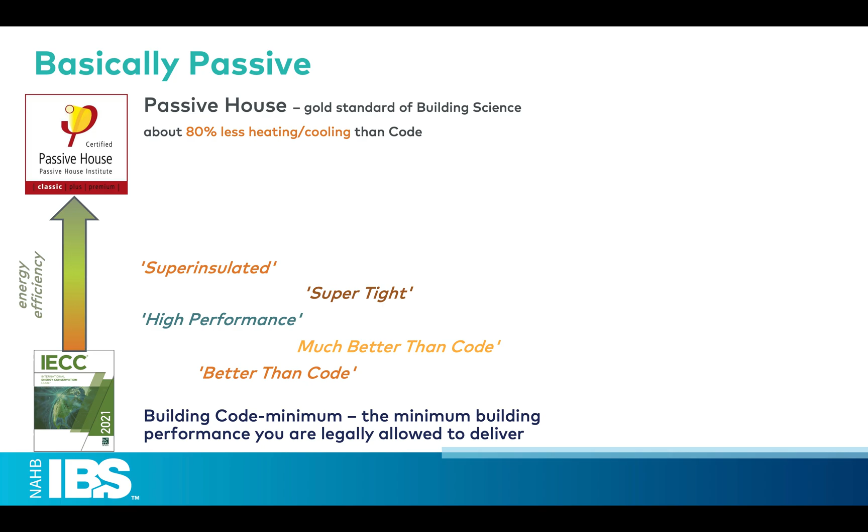My building is super tight. It's super insulated. It's a zero utility house. It's so good. It's passive solar. It's basically passive, but we haven't done the modeling.

Now, all of these terms are so confusing and they circulate freely and constantly in the construction industry, which makes the conversation much foggier and difficult to understand for everyone. I'm not saying the passive house certification is the answer for all projects. What I'm saying is that we want to have clear expectations when we start off on a project, because based on that expectation, we define success, we define failure, and we have an expectation set up with the client to meet. It's a promise that we meet, and we have to deliver on that promise.

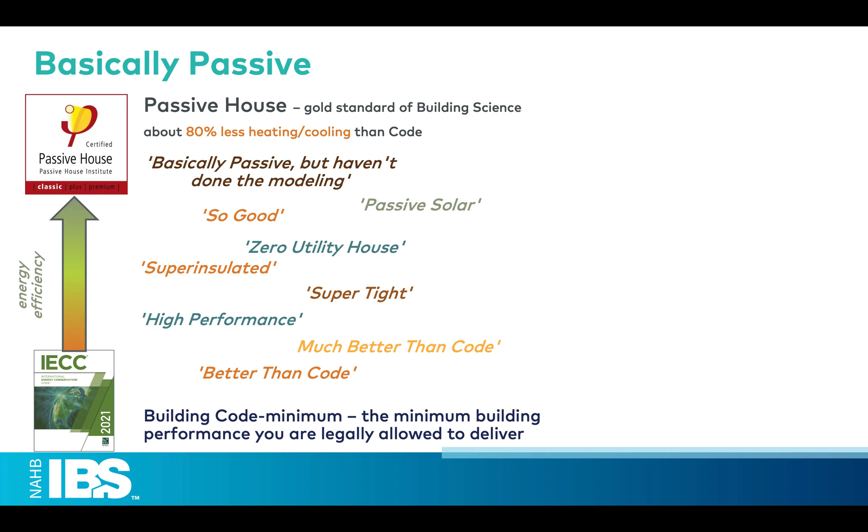Now, take a step back from the construction industry and think about this. You go to the hospital because you have this. Your arm hurts and you want to get an answer. And the answer you get to the hospital is it's broken, or it's basically broken. It's better than broken. You can see this is the same logic that we have on the left-hand side of the screen for the construction industry applied to the medical field.

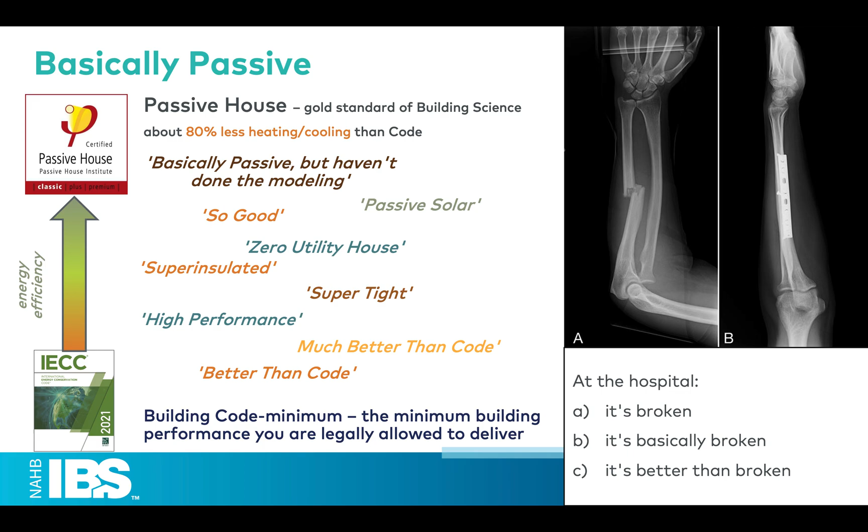If at the hospital they told you it's better than broken, you would flip out. You would not accept that. In the construction industry, we get all of these fuzzy definitions that mean nothing, and we are okay with that for some reason. Now, there is a risk with that, and we call these intermediate obscure terms, super tight, so good, better than code, we call these floaters because they float between the minimum of code compliance and the maximum of passive house certification.

And again, I'm not suggesting to certify every single building. What I'm saying is that we have two standards, code and passive house, that are very clearly defined. You can go online and find the definition of code or the definition of passive house and follow them. And by compliance or by certification, you can have certain expectations and goals. Whereas if you are floating in between, it's very hard to manage because you have undefined expectations which do remove structure. It makes everything harder to pin down.

I heard from the client that they want this window because their cousin told them it's better performance than XYZ. Now, for code compliance, we have a maximum allowed U value. For passive house, we have what is called the comfort requirement that drives the selection of windows and doors. And anything in between, if you remove those two, you are guessing. You are tossing a coin in the air and trying to catch it and see which direction to go because you just don't know. The risk is to overpromise and underdeliver, to overkill or overpay. There's many risks with this, which all come down to the expectation not being well defined, and it's very hard to meet or deliver an expectation that is not well defined.

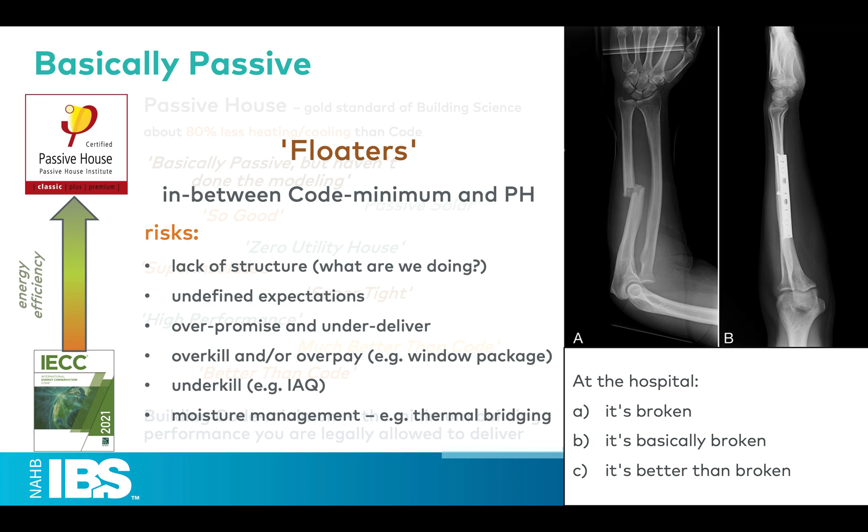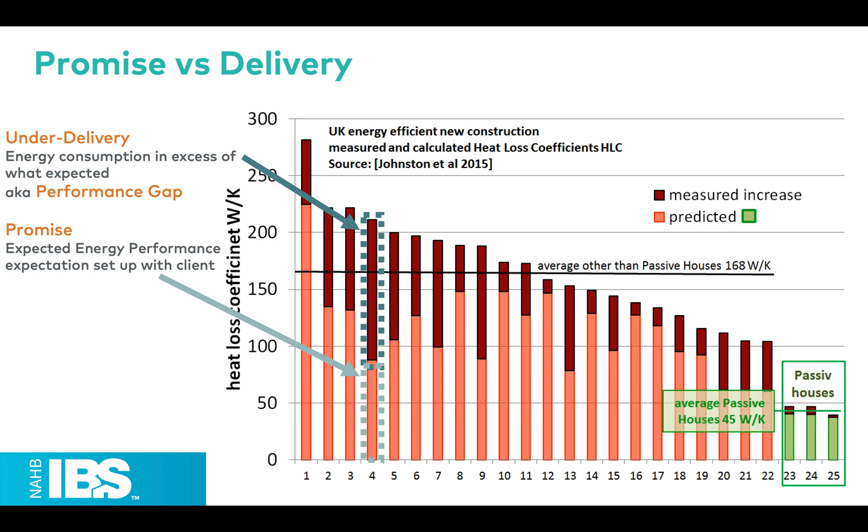Now, this is an example from the UK of monitoring the energy performance from multiple buildings over the years after occupancy and seeing how they were delivering the performance of energy efficiency that they started off with from the design. So we have a promise that is the predicted or expected energy consumption, and that is the salmon pink part of these columns. And then the darker maroon red is how much more energy these buildings were consuming because they were not meeting the expectation. There's a performance gap between the energy consumption that the design expected and how much energy they're actually consuming. And in this graph on the right-hand side, we see three passive house projects where the gap between predicted performance and measured results is so small that it's basically negligible.

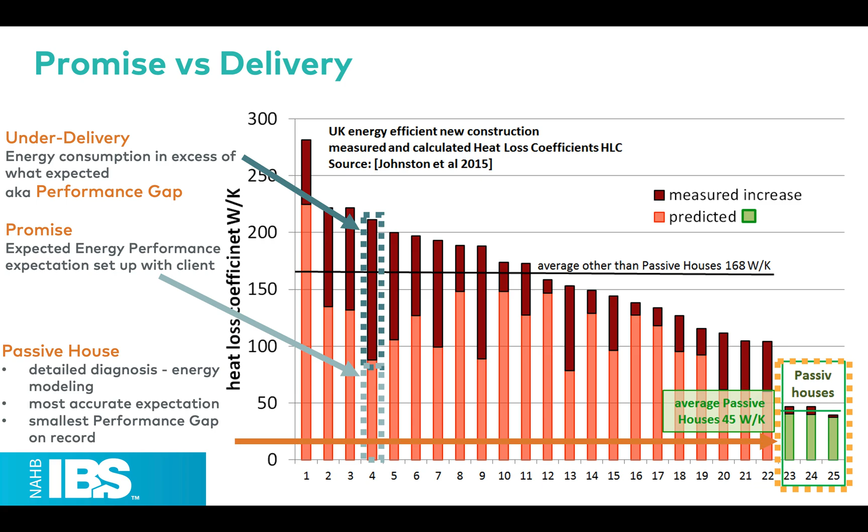So this is the point I'm trying to make. We are making a promise to our clients that we need to deliver on. And if we don't have a clear structure to follow through the design and construction stage, we are very much at risk of not delivering on that and having very unhappy clients because the delivery did not meet the expectation.

So to give an example of a project, I don't know if you've seen the previous presentations for Enrico and Enrique. I do this presentation based off of the climate of the location where I'm giving this presentation. This presentation specifically was set in Vegas. So I set this presentation up for the climate of Vegas. We have other climate zones for locations that I've given this presentation to in the past, for Texas, for Tennessee, and we have more for colder climates coming, in Maryland, in Minnesota, in the near future.

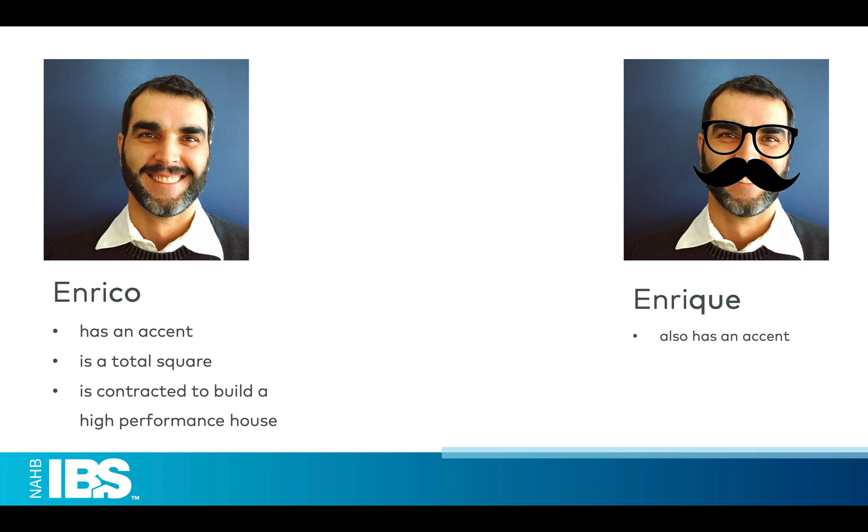Enrique also has an accent, Googles a lot, and he's contracted to build a house better than Enrico. So we're gonna see how Enrique is gonna go above and beyond to beat Enrico throughout this presentation. To meet the client expectation, we're gonna have different steps, and we're gonna see if we're gonna deliver on that promise.

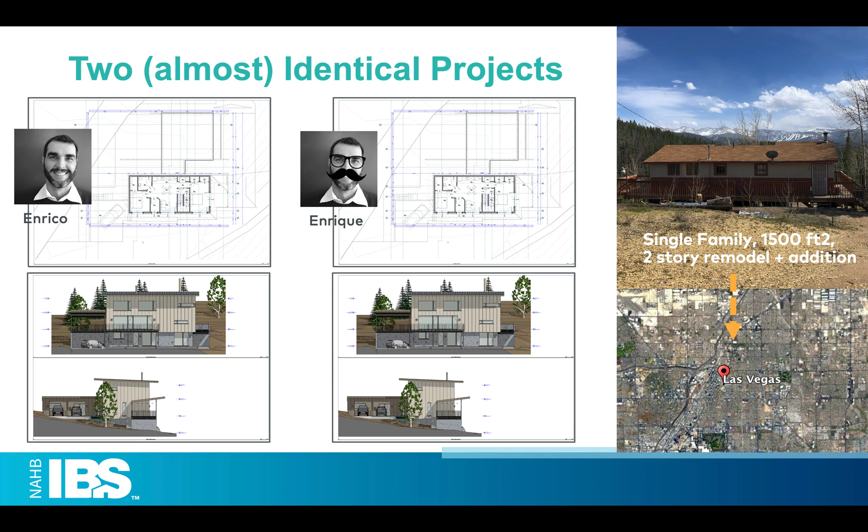Now we have a project that is my house up in the mountains of Colorado that I have conveniently moved the energy model to Las Vegas to perform the analysis. And Enrico and Enrique are contracted to build two different buildings almost identical to one another. Same floor plan, same elevation, same building sections. They're just going to tweak different details to get to their goals. And because this is Vegas, it's time to have some rooftop celebration before we get started.

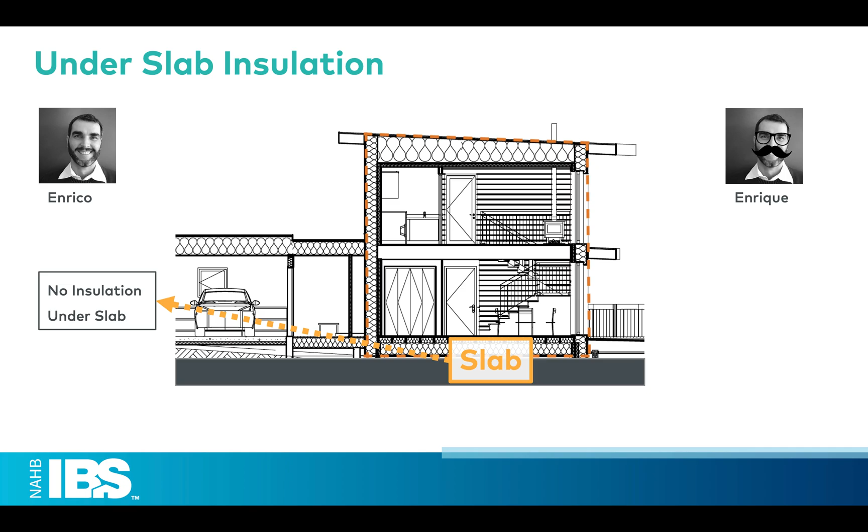Starting off from the building envelope, Enrico has done the modeling, and for the slab, decides to use no insulation on the slab. At the end of the day, Vegas is in a hot climate, so Enrico thinks he can get away with that. On the other hand, Enrique thinks we want to have insulation on all sides, so he decides to use 3-inch of XPS on the slab.

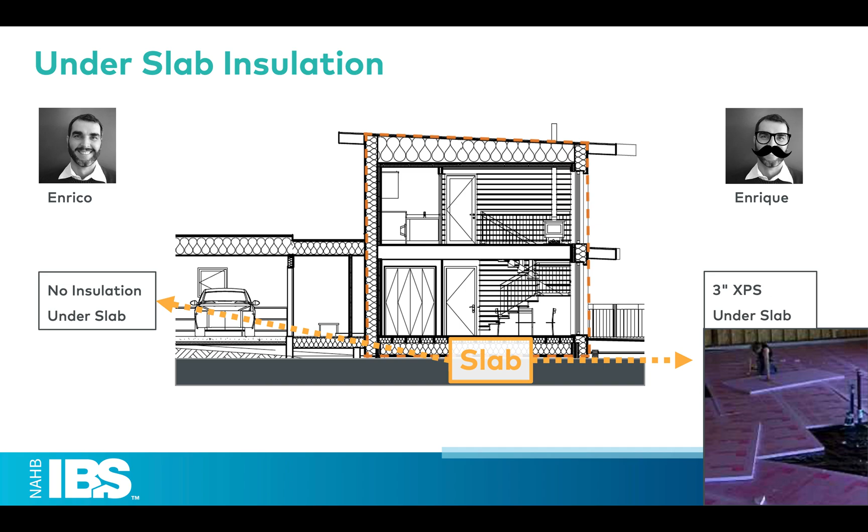For the exterior walls, the goal is to have R30. Enrico does a wall assembly starting from the inside with drywall, then dense pack cellulose in the 2x6 cavity to get it to R20, then the plywood sheathing, 2-inch of polyiso exterior as continuous insulation to get an R12, and then the rain screen system. Whereas Enrique does something similar but a little bit different in that he has the drywall, the dense pack cellulose in the 2x6 cavity, and then the R12 ZIP-R sheathing, and then the rain screen.

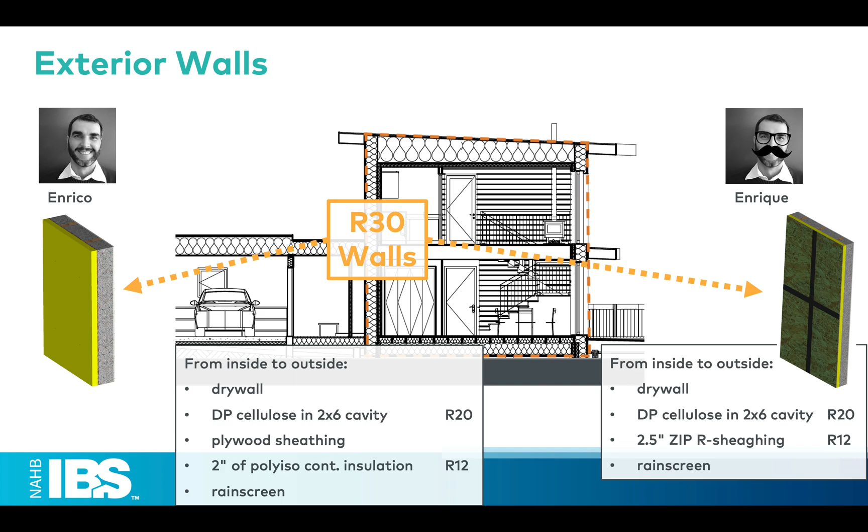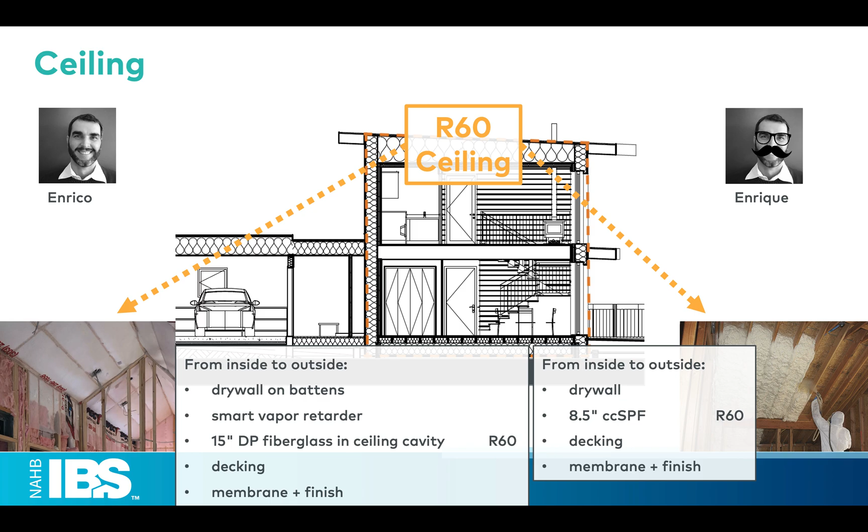For the ceiling, Enrico uses 15-inch of dense pack fiberglass to get to R60 and has a smart vapor retarder on the interior, whereas Enrique uses 8.5 inches of closed cell spray foam to get to the same R60.

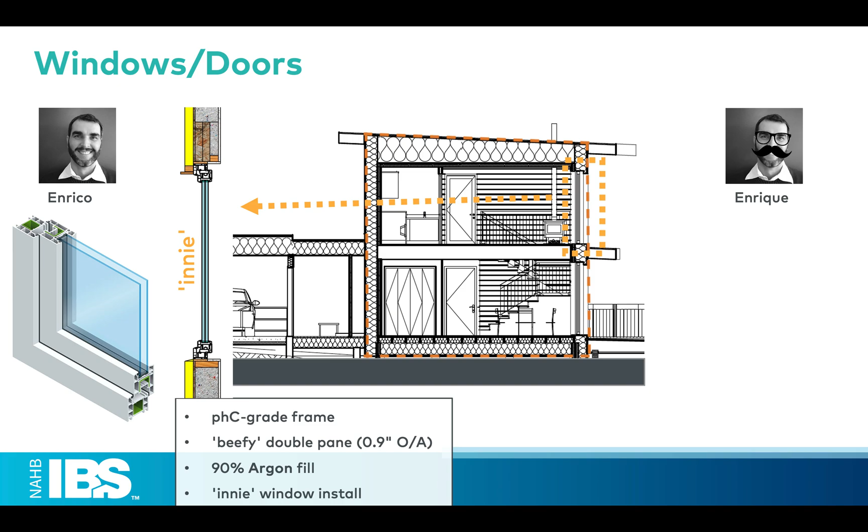Then for windows and doors, Enrico thinks he can get away with double pane glass with 90% argon fill and uses an innie window install detail where the window is lined up with the center of the insulation. That is what it looks like in the section drawing. On the other hand, Enrique uses a triple pane because he wants to go above and beyond Enrico.

Although Enrique has found online that the argon fill escapes after only a few years after install, so that's not worth it, and sticks to the air fill instead of argon, and then uses a more traditional outie install where the window is lined up to the exterior in a more conventional install detail.

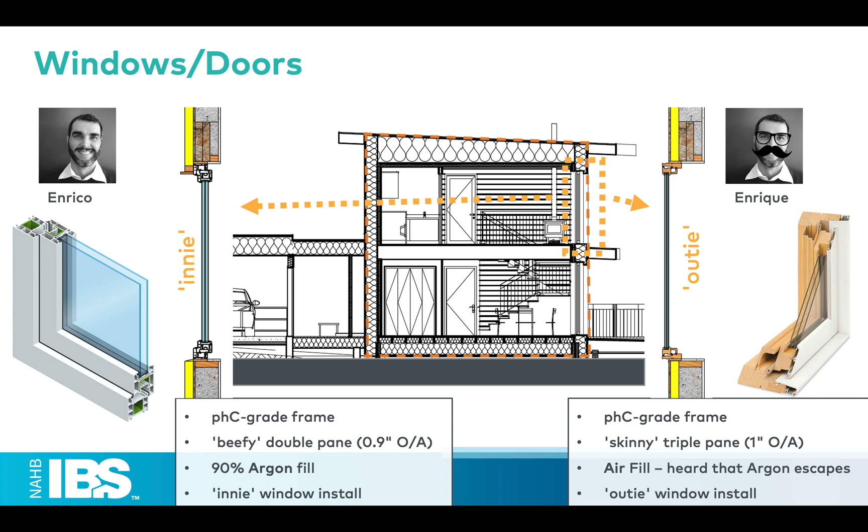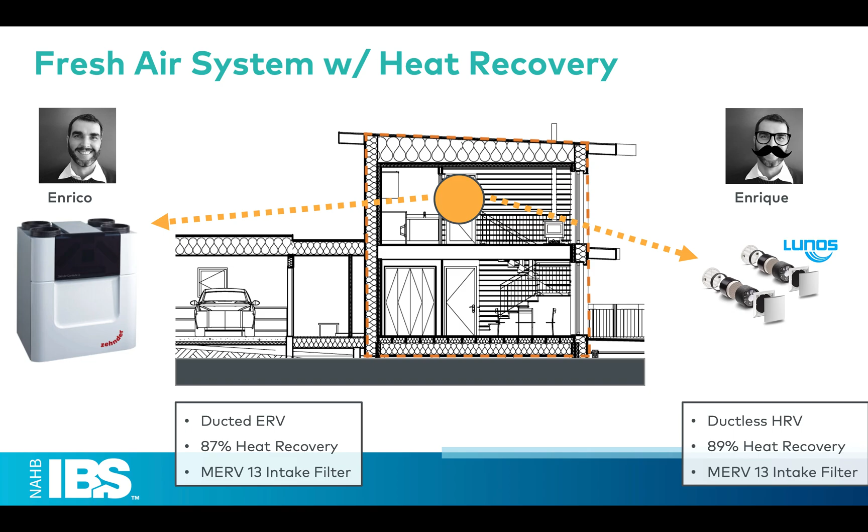Then for fresh air system with heat recovery, Enrico uses a centralized ERV that is ducted to the individual rooms with 87% heat recovery, whereas Enrique uses ductless HRV with 89% heat recovery, so a little bit higher heat recovery for Enrique.

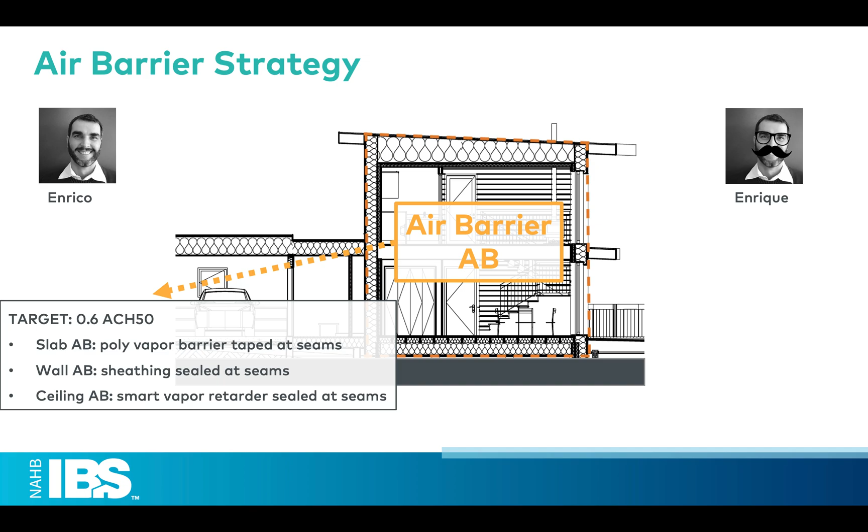Air barrier, the target is to get 0.6 air changes per hour at 50 Pascal. For the slab, Enrico uses the polyethylene membrane that is the vapor barrier. He seals that at all seams and penetrations, and that is the air barrier under the slab. Then uses the sheathing sealed at all seams for the walls as the air barrier. And finally, at the ceiling, he uses the smart vapor retarder membrane as the air barrier.

Enrique does something different. For the slab, he uses the same poly membrane as Enrico does to be the air barrier. For the walls, he uses the drywall taped at all seams as the air barrier, and then at the ceiling, the closed cell spray foam is itself the air barrier.

Enrique also goes above and beyond in that he hires Aerobarrier to get to that 0.6 air changes per hour. Now, if you don't know Aerobarrier, that's a company that has a product. Basically, they nebulize and spray sealant agent in the air inside the building that goes and seals all the cracks and makes the building airtight.

That is a game changer, in my opinion, for retrofits where you don't get to pick and choose your framing and your sequence with your air sealing. But we're gonna see what that means to get to 0.6 with Aerobarrier for Enrique in this presentation.

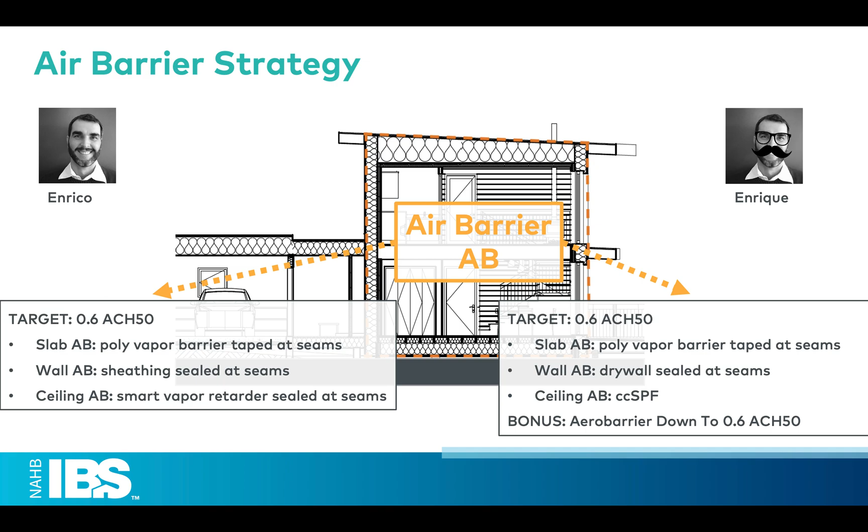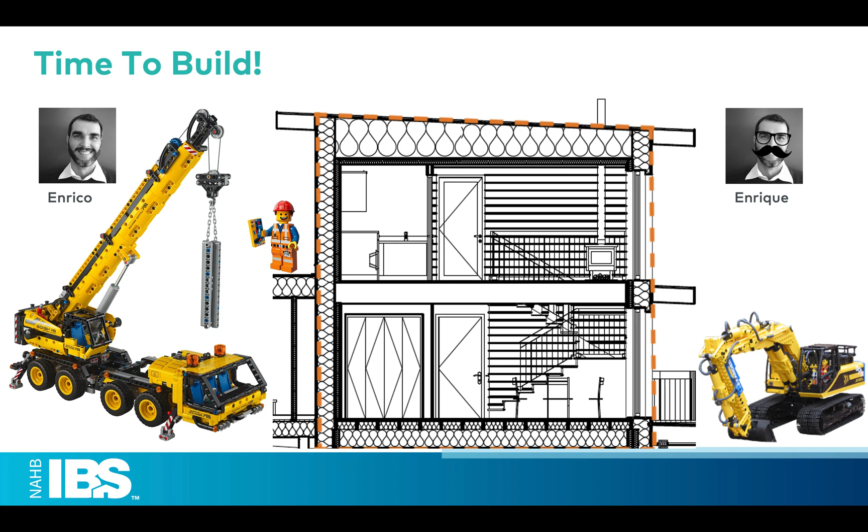It's time to build. Starting from crunch, crunch, crunch, get to the construction, yay. And eventually we do the blower door test. Enrico gets to 0.6, yay. Enrique also gets to 0.6, yay.

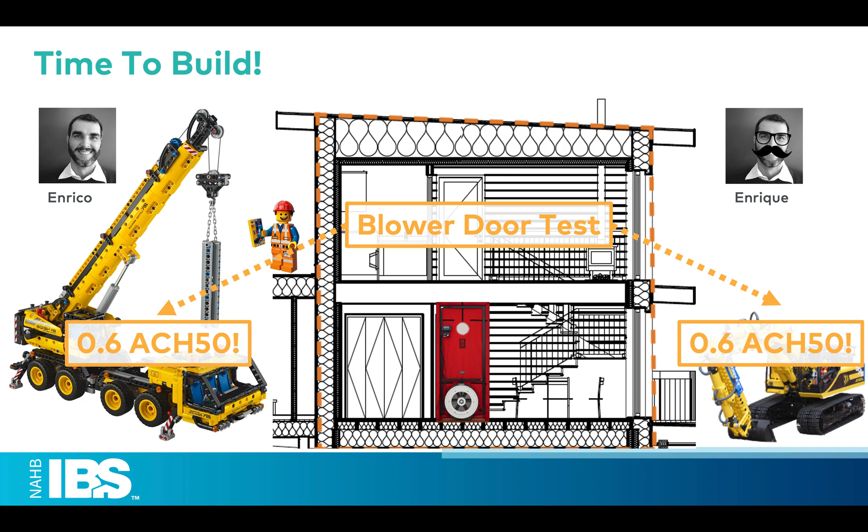Funny story, I couldn't find a Lego version of the blower door test. So Lego, if you're listening, that's a good hint to educate our kids about the importance of the buildings being airtight. But anyway, both buildings get to 0.6, and that's awesome.

So this is the expectation we have. This graph shows the expected energy consumption for heating and cooling over a typical year. Left hand side is Enrico, and right hand side you see the column is lower because Enrique has put in all of this extra, the XPS under the slab, the triple pane, the Aerobarrier, blah blah blah, but didn't do any of the modeling. Enrique expects 30-40% savings, less energy consumption compared to Enrico, but hasn't done any of the modeling.

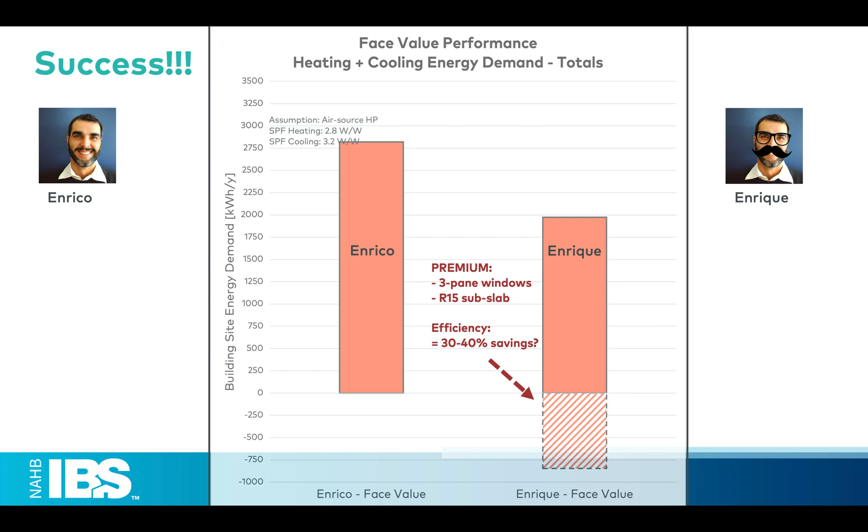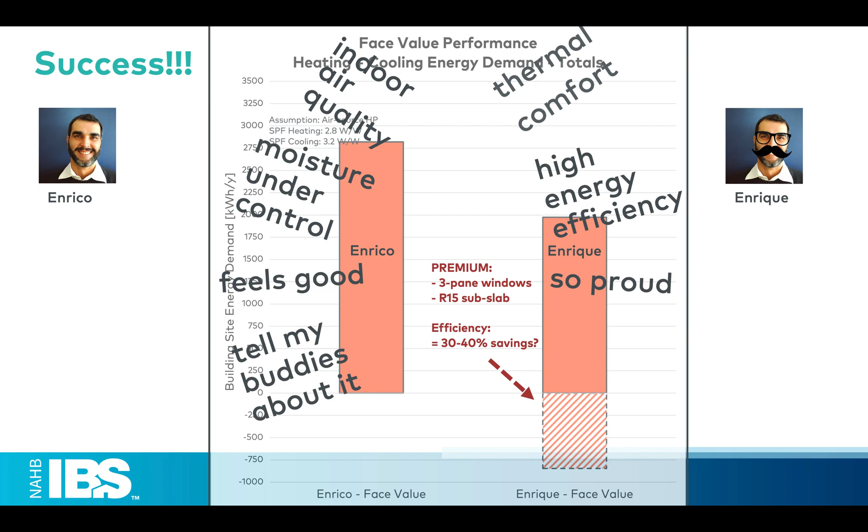And this is awesome. So we have hit the indoor air quality target, we have thermal comfort, moisture control, high energy efficiency. It feels so good. I'm so proud. I'm gonna tell my buddies about this project. Happy, happy, joy, joy. Puppies, kittens, yes, meeting expectation, rainbows, everybody happy.

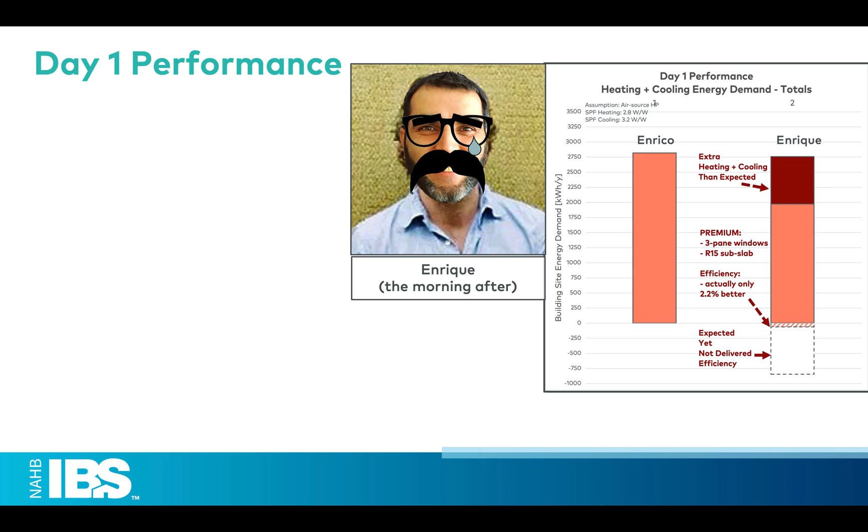Until day one kicks in and we start looking at performance. And Enrique's building is actually consuming a lot more energy than anticipated. You see on the right hand side, we use the same colors as the study in the UK, and the dark red color on Enrique's column is the extra heating and cooling that his building is causing because it's underperforming. So there is a gap between the expected performance and the performance that was actually delivered.

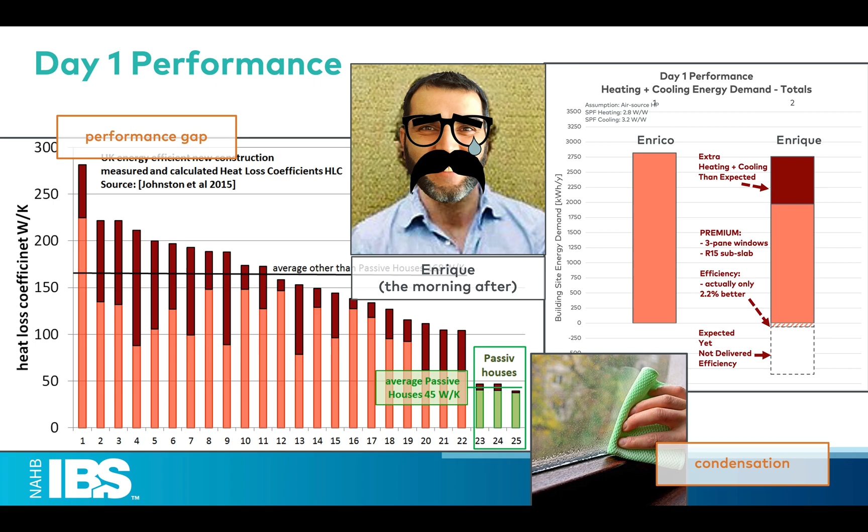On top of that, Enrique's building also has condensation issues, which is something that clients get really mad about. So let's see what went wrong, and keep in mind that this is for the climate of Vegas. The C word in construction is condensation. This is where we need to start looking at details very closely, because the more buildings become airtight, and the closer we get to buildings consuming zero energy, the more every single little detail matters.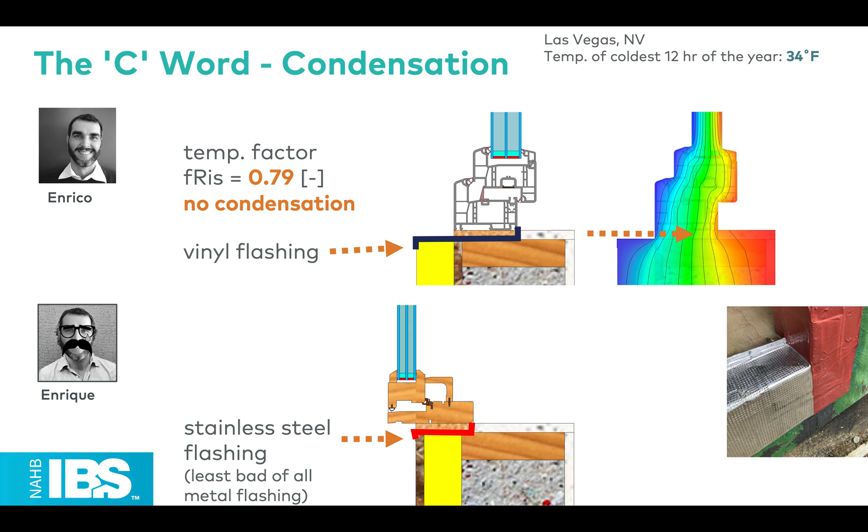Now, the isotherms: when you look at the thermal model, the right hand side is warm because it's inside, the left hand side is cold, it's blue, it's on the exterior, and those black lines going along the model are the lines with the same temperature. Those are the isotherms. And we look at those to see how temperatures distribute over the detail.

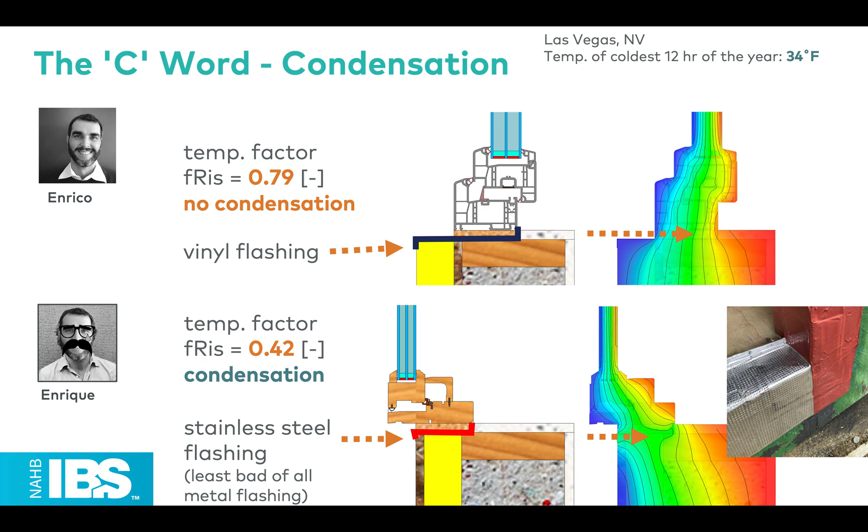And that leads to one piece of the science of passive house, the temperature factor. I'm not going to expand on what the temperature factor is. We have articles on our website that you can look up. But if the temperature factor is too low, it will lead to condensation, which is what is happening in Enrique's project right now. So again, these details with the sill pan or threshold pan being steel and cutting all the way through under the frame are a no-no in high performance airtight buildings. So we need to rethink how we do details to prevent this.

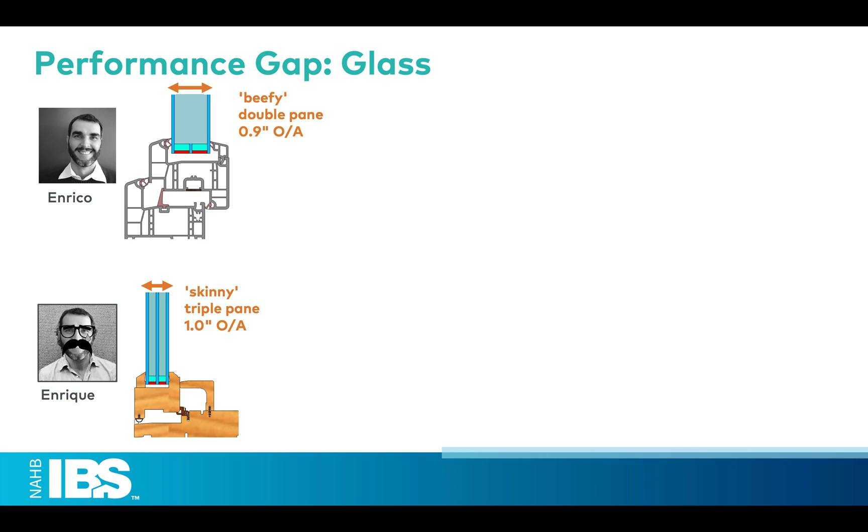And in this condition, the double pane performs better than the triple pane, because if you get a triple pane that is too skinny, in this case we call skinny a 1 inch overall thickness of the glass unit, then the glass is going to underperform.

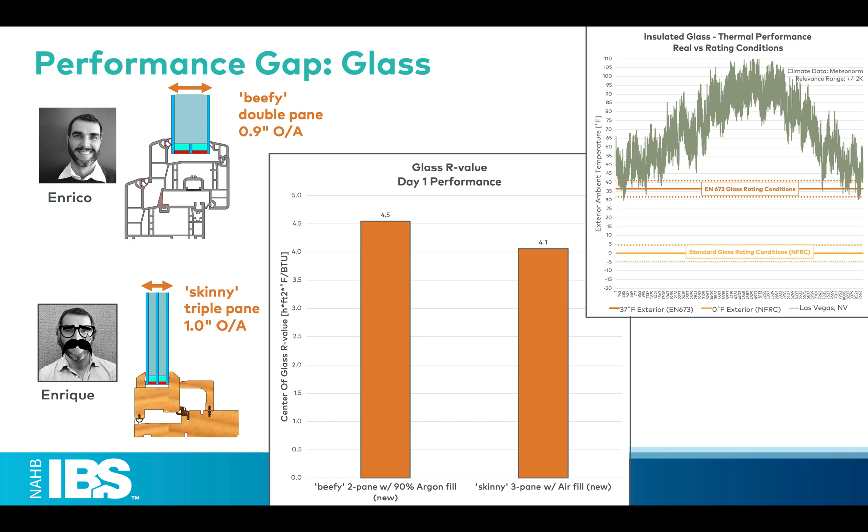In fact, we modeled some glass options for an actual project in Colorado, and the manufacturer was proposing quad pane, thinking that it was going to perform better, and it is more expensive, but it actually ended up performing worse than the triple pane, and it costs more because it's quad pane. So you really want to be careful about choosing one product over the other, because you may be paying for a premium and not receiving the value that you're paying for.

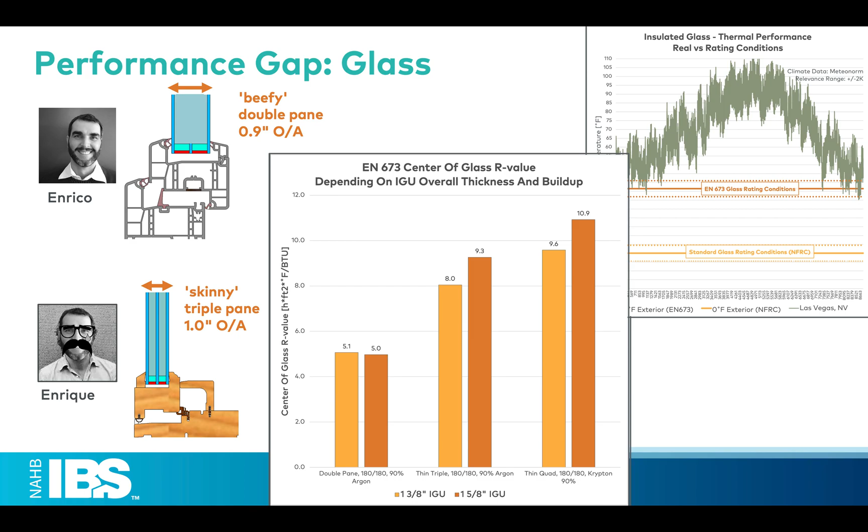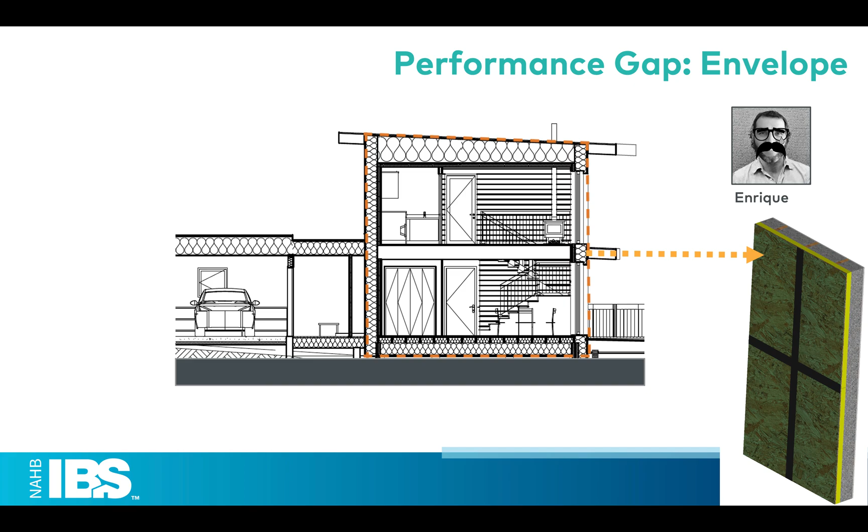We don't really count the individual nails, but we account for any metal fasteners going through the insulation in passive house. Whereas for net zero or high performance or any other in-betweens, you don't get to that level of detail in your energy model, and that leads to a performance gap. That leads to your building underperforming. Now, in this case, we have so many nails through that insulation that Enrique loses about 10 to 15% R value just because we have more heat losses through those fasteners.

Then at the ceiling, Enrique used spray foam. Now, spray foam performs awesomely in a lab, and in a lab, you can rate that spray foam to be up to R7 per inch or more. But in the field, it's very hard to get to the perfect mix of temperature and relative humidity. Plus, manufacturers often spec a maximum thickness that you can do for each pass. And if you're doing 8-inch thickness like Enrique, you will have to go back 4 times because the manufacturer requires you to do at the maximum 2 inches per pass. Whereas if you bump up the spray nozzle and do 8 inches in one pass, you're cutting corners, you're going to get underperformance.

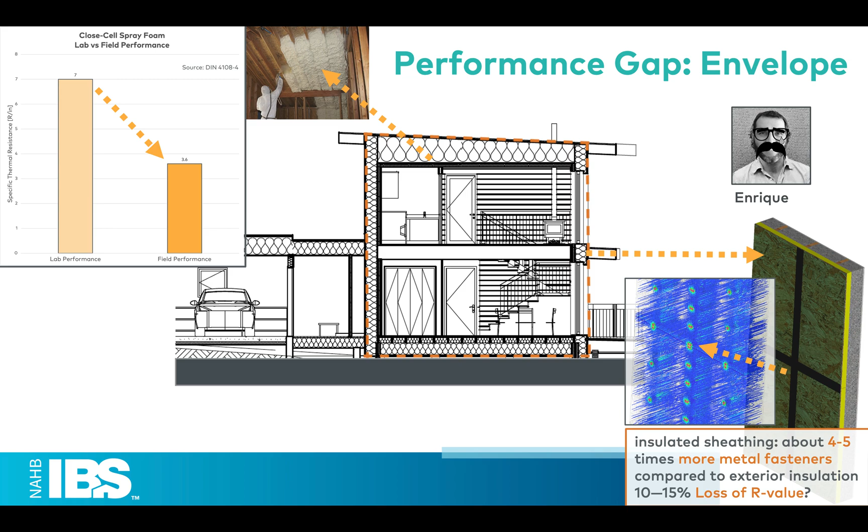In fact, the same spray foam in Europe is not rated at R7 per inch, it's rated at half of that, at about R3.6 per inch. And that is the performance that Enrique gets in the ceiling. So instead of R60, he ended up getting about R30, so a lot of underperformance there.

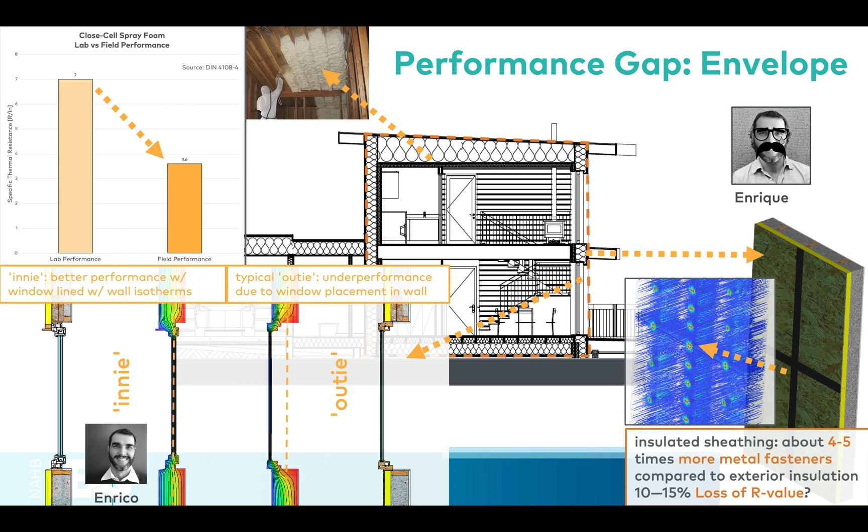This install detail is designed poorly because the glass should be centered with the center of the wall's R value, of the insulation, and it isn't. So that is a cause of the performance loss due to poor design of the detail. This is not yet accounting for the quality of the install. And you have an example of what an optimal position would look like with the innie install for Enrico on the left hand side, where the center of the glass is lined up with the center of the insulation of the wall. Now that alignment does not need to be smack down the middle, but it should be close. Otherwise, you're going to pay a price in terms of performance gap.

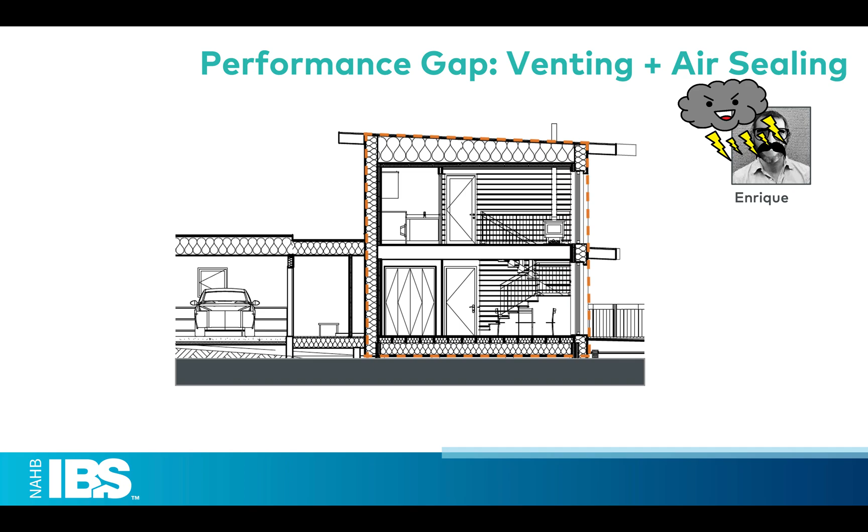So Enrique starts to feel very bad about his project. Now, more performance gap in the venting and air sealing. We looked at these HRV ductless units, and they have a nice report saying that they can have 89 or 90% heat recovery. Now, unfortunately, the standard they are rated at, DIN 308, is a poorly written standard, meaning that it does not account for intermittent operation, that is what these units do, and it does not account for the energy consumed by the fans in the process.

So the less efficient the fans, the more heat the fan loses, the more you believe you have a higher heat recovery because the temperature of the air is higher, but in fact it is the inefficient fan that is actually warming up the air. It is not the ventilation unit actually recovering the heat. So in reality, these units don't perform at 80 or 90%. They actually deliver around 60%, and that is another piece of the performance gap that Enrique has to pay.

Similarly, we talked about Enrique using Aerobarrier to get to 0.6. Now, Aerobarrier is a great product, especially for retrofits. On the other hand, the reports they give are misleading in that in the process they spray and nebulize a caulking agent, so a sealant. So any windows, any ducts that you have, you need to put masking on to protect them. And that masking contributes to the apparent airtightness of the building.

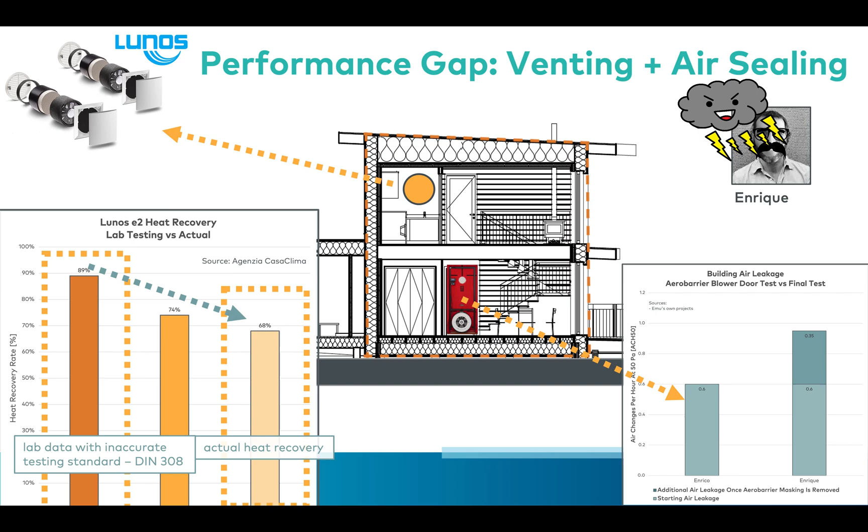All the finishes are there, all the appliances are there, so no masking is allowed. And what we saw, the difference between the preliminary and the final with Aerobarrier was a significant increase, which is reflected in this graph. So we saw a breakdown of all the individual causes of performance gap, and that is what is causing Enrique's project to underperform. Now keep in mind that he paid a premium for that. He got the triple pane glass, he got the XPS under slab, he got the ZIP R because he thought it was a better thermal break, and so on.

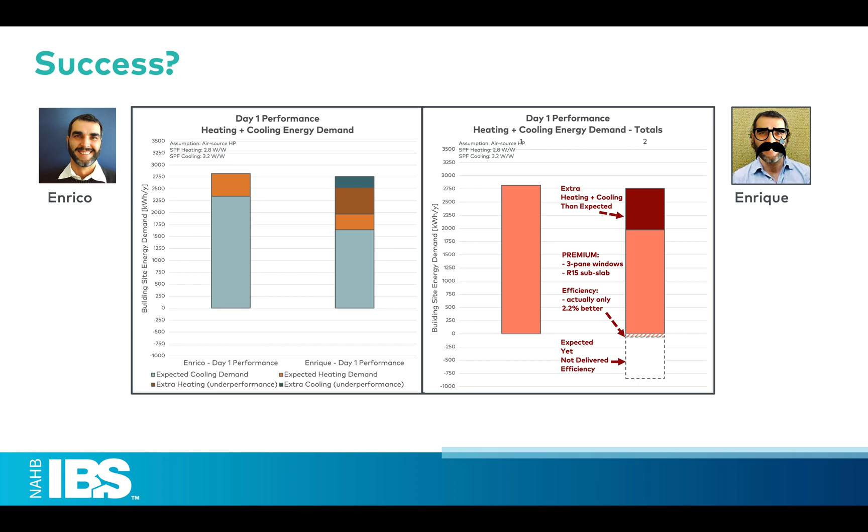And Enrique still got to a much higher energy consumption than Enrico. Now, something that we don't see much being talked about is how does this high performance age over time? We talked about airtightness. We talked about windows having gas in the glass, about the insulation, all that. How does that age over years? And we looked at a 13-year span because that is the average amount of time that a family is going to stay in the house before they move out again.

Now, as professionals, we need to move away from what we believe and we need to frame our conversation around the data that we see in the market. Now, you may have believed, or we may have builders believe, that the family stays in the house for 5 years, but that is not a professional conversation. That number is actually 13 years, and that is what we used in this presentation today.

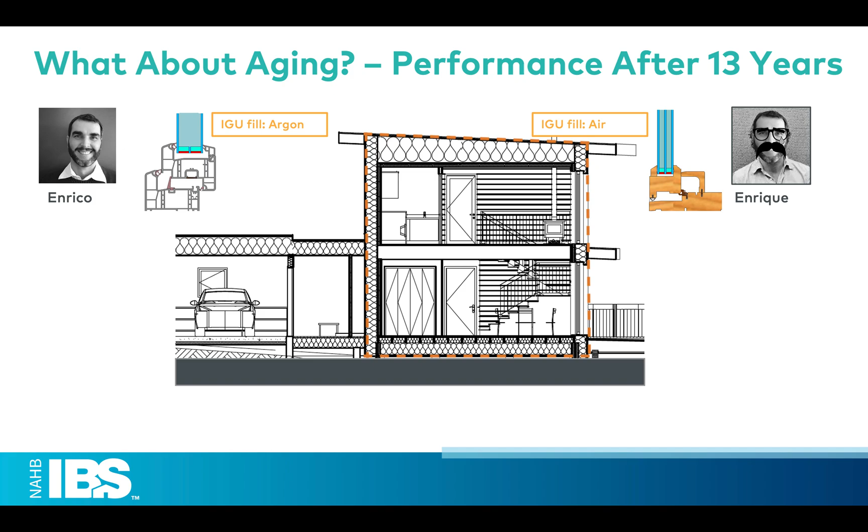Now, we talked about argon, and that is what Enrico chose, whereas Enrique thought, oh, that is going to underperform over time because all the gas is going to be gone shortly, so why bother? Now, the argon does go away a little bit. We're going to see how much. Now, at day one, we saw that the double pane glass with argon fill was outperforming the skinny triple pane with air fill.

Now, keep in mind that when we work on projects, typically the decision between triple pane and double pane is driven by comfort. And generally speaking, climate zone 4 and higher, we end up speccing beefy triple pane for comfort reasons, not for energy, not for payback, it's for thermal comfort. Now in Vegas, that is less of a problem because it's a warm climate. So Enrico can meet the passive house comfort requirement by just using a good double pane.

And whereas Enrique thought that with the triple pane it would be passive house, so I need triple pane, check, and that is not the case. And he ended up with a skinny triple pane that underperforms compared to a double pane with argon fill.

But what happens over time once the gas starts escaping? Now, again, looking at the data, we can expect about 1% loss of gas each year. Now, the glass unit is never going to be 100% filled with argon. If you see a manufacturer that claims 100% argon fill, that is a lie. There is no technology today that allows to achieve and guarantee 100% of argon. Maximum is 90%. Some manufacturers claim 95%, but in my opinion, we stick to 90%.

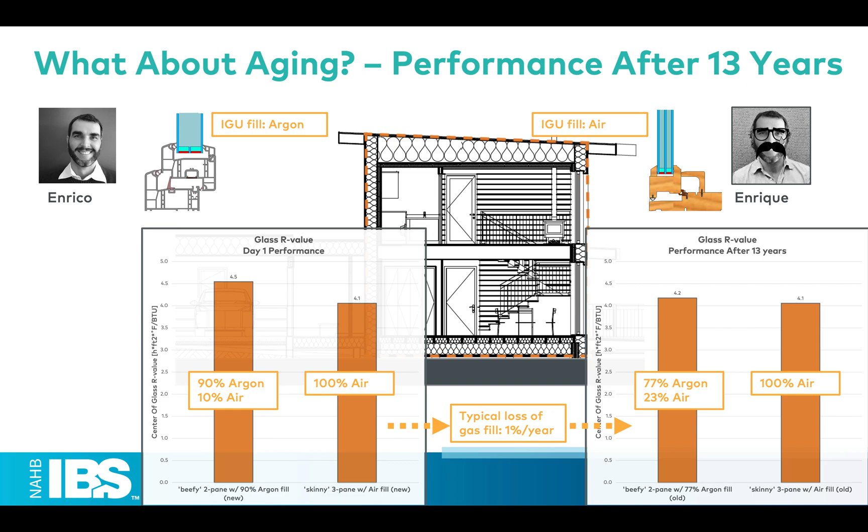So this is where you don't want to pay the premium in Vegas for the triple pane. You want to have the argon fill, which is actually quite affordable. This is where you may have the perception of getting a better product with the triple, but you're actually buying something that is underperforming. So be very careful about that. Then what about insulation?

Now, XPS at day one performs at R-5 per inch. Now, over time, it loses some of its expanding agent, so over time it loses some R-value, and that is reflected here. In fact, in our modeling, we use R-4 per inch as our default design value because we want to guarantee the performance of the building over 20, 30, 50 years. So that is something that is very important for you as the professional, to base your building on the expectation of a certain dependable performance of your product, so that overall performance can get you to a very durable building.

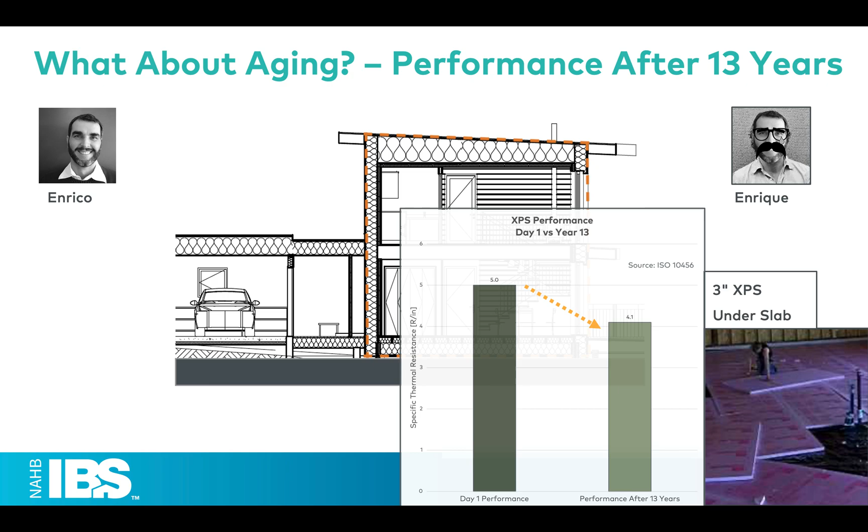Similarly, buildings may become more leaky over time. Now, the oldest modern passive house was built in 1991 in Darmstadt, Germany, and at day one they scored about 0.3 ACH50, and after 25 years they replaced the gaskets at windows and doors because that was considered to be part of the maintenance of windows and doors after 25 years. And then they tested the building again, and they again hit about the same 0.3 ACH50. So if you choose the right product, that airtightness is something that is very durable. We have literally had buildings that prove that after 25 years, that durability stays there.

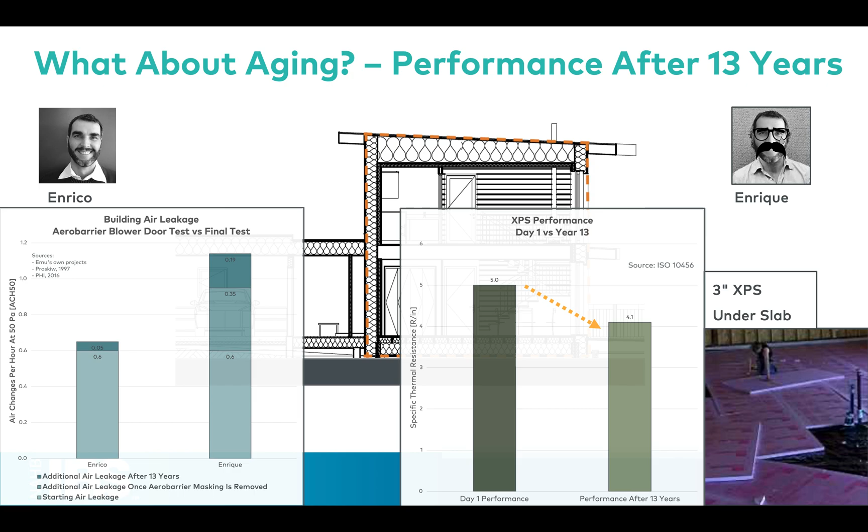You see 0.05 increase in air leakage over time for Enrico, and 0.19 additional increase in the ACH50 for Enrique. So they both started off at 0.6, and after 13 years, Enrique's building is almost twice as leaky as Enrico's. You don't want to do that. You want to have something that is very dependable. So all of this contributes to an increase in the performance gap for Enrique, and Enrique paid for that premium. So Enrique is very pissed. He's very emotionally charged in a non-positive way about what he did in this project because he paid more for a building that is not performing.

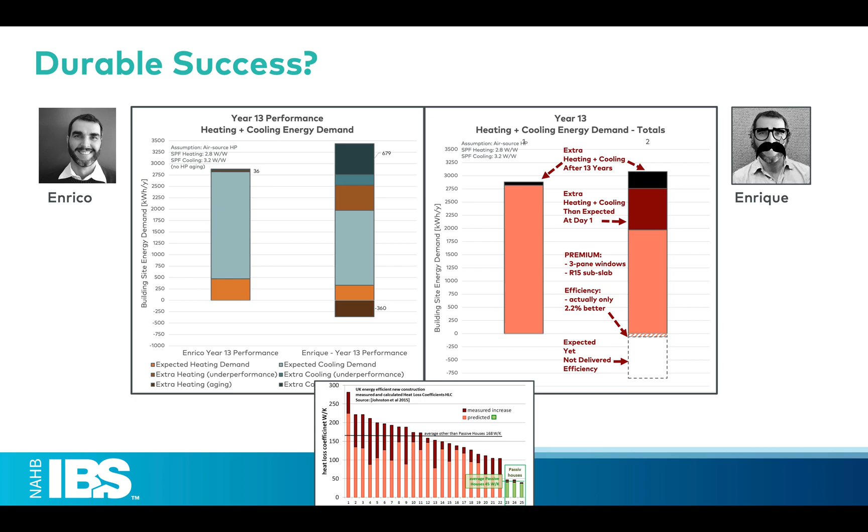So conclusions: the closer we get to zero energy consumption in buildings, the more every detail matters. You'll always find plenty of help to spend your money. Whether you're going to get to your goals is a different matter. And whatever those goals may be, the performance-based analysis allows you and your client to make informed decisions. Is A worth it, or is B better because it's cheaper? Is B actually delivering what they are claiming? All of this is extremely important to achieve a higher performance.

And Passive House, as an international standard, provides a scientific method to prevent mold and condensation by means of the temperature factors that we saw earlier, and to deliver higher quality in terms of indoor quality, comfort, and energy efficiency in a way that building code is honestly decades away from enforcing and implementing. So that is why we push to use the passive house science in every project, although they may not be seeking certification, but just a higher quality of living and building standard.